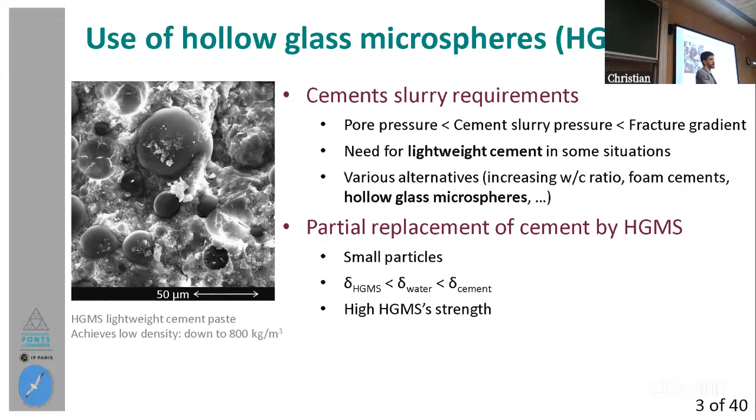For this purpose, I'm going to focus on two main aspects: the filler effect and the pozzolanic activity. To understand this, we first need to understand cement hydration. The clinker is composed of tricalcium silicate and dicalcium silicate that react with water during cement hydration to form calcium hydroxide and calcium silicate hydrate.

Knowing that, these spheres may present some filler effect, which in the context of this thesis, not at the scale of the sphere but at the scale of the hydration products, may act as nucleation sites for cement hydration products. This increases the kinetics of hydration and improves or increases the compactness of the material at short curing time. Then at long curing time, we can also have pozzolanic activity.

This is a chemical reaction between the silica of the spheres and the calcium hydroxide from cement hydration, forming secondary CSH. This reaction is also well known for increasing the compactness of the cement matrix, which a priori is a good thing. But the cement will not only be subjected to replacement with the spheres, but also to the conditions existing in a CO2 injection or legacy well.

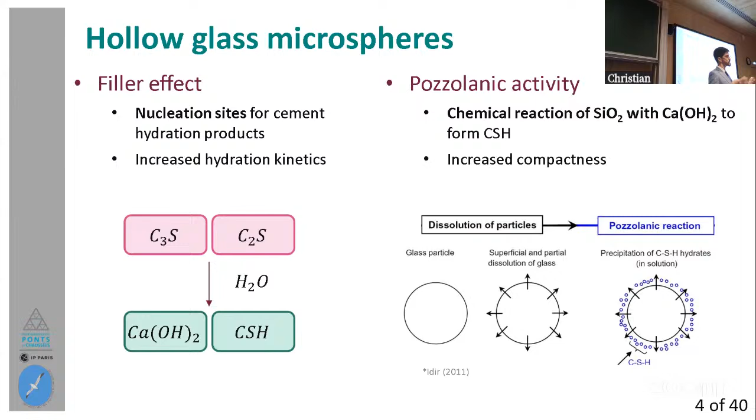In this regard, we have to take into account cement paste carbonation: calcium hydroxide and CSH react with carbonic acid to form calcium carbonate, water, and leached silica. This results in a change in porosity and a decrease in pH due to the consumption of calcium hydroxide. This will be important later on, that's why I'm focusing there.

From the research of Kutchko and Barria, there is a propagation of the carbonation front, in which we have an inner part that is mainly unaltered, and an outer part that is more altered by this exposure.

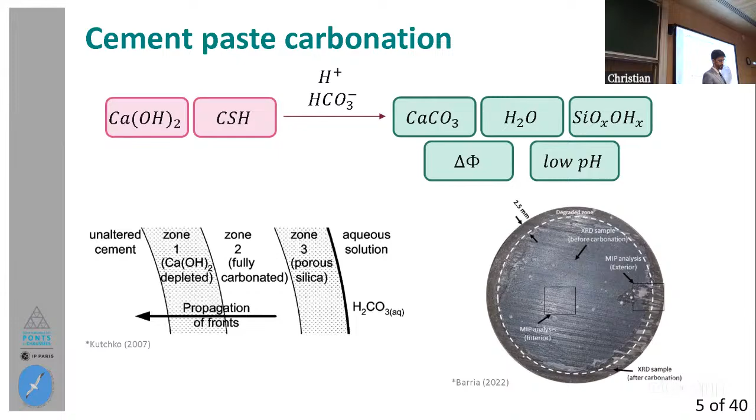With all of this taken into account, we can now establish the main objective of this research: being able to assess the performance of this lightweight well cement paste, in which we replace cement with the spheres, for CO2 geological storage. To reach that main objective, we have three different objectives.

The first is assessing the properties of the cement with spheres in terms of microstructure characterization and mechanical properties. Then we assess the changes in these two properties due to exposure to supercritical CO2 conditions. Finally, we verify the suitability of this compound lightweight material in the context of CO2 geological storage, injection, or legacy wells by numerical modeling.

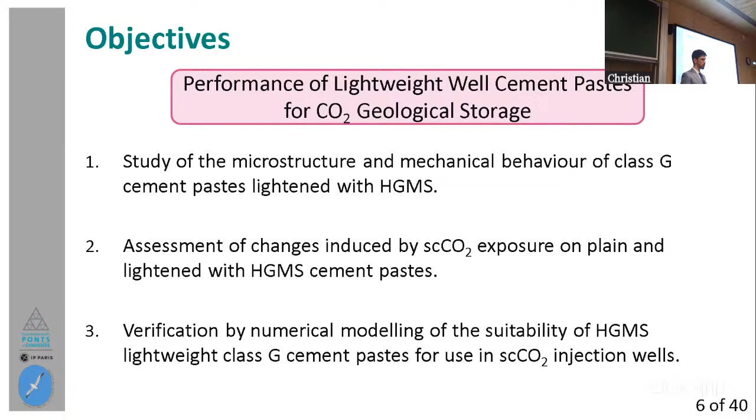Having said that, here is the general outline of the presentation, which has two main parts. First, the experimental characterization part, which I will talk about right now. Then I will have the modeling part. Finally, I will present some conclusions and perspectives related to this work.

Advancing to the experimental part, I'll show you the materials I have been using. I have three main materials: hollow glass microspheres called HGMS27, which will be the green one, and HGMS41, the blue one. In that table, you can see the main properties of these two hollow glass microspheres.

First, the very low density of 280 and 460 kilograms per cubic meter, the mean particle size of 30 and 40 micrometers, then the strength, which gives them the name: 27 megapascals for HGMS27, 41 megapascals for HGMS41. Then we have the content of silica, which is high in both of them.

This is related, if you remember, to the pozzolanic activity, which is around 60% for both of them. Finally, I have used class G cement, a moderate sulfate resistant class of cement manufactured according to the 10A standard of the American Petroleum Institute, which has a density much larger than that of the spheres, around 3,000 kilograms per cubic meter.

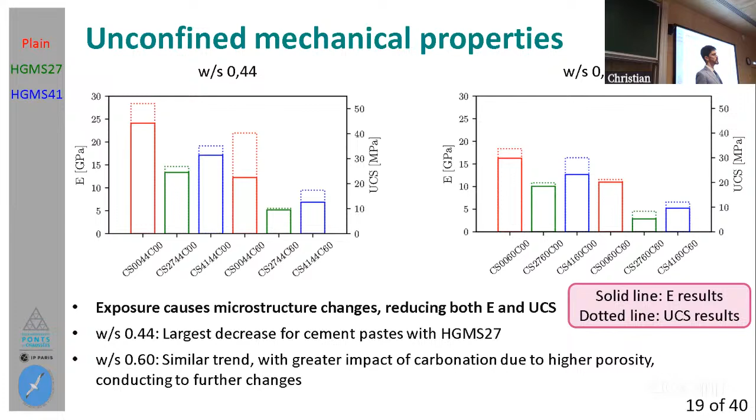If we now want to take a look at the results of strength obtained on both unconfined and confined compression tests, here I show you the results of unconfined compressive strength which I have shown you before. The solid line points correspond to the non-carbonated specimens, and the dotted line points correspond to the carbonated specimens.

You will see that we have this lower strength at low sigma 3, but then as we increase the sigma 3, we have a larger extent of the increase in the frictional behavior of the cement paste after carbonation, which can be seen here to here.

With this data, we're able to obtain these strength parameters that we will then use in the modeling part, which are the results of cohesion and friction angle for the non-carbonated samples in this table here and the carbonated samples in this table here. You will see that the cohesion here is relatively high and here is relatively low, and then the friction angle here is relatively low and here relatively high, which corresponds to the behaviors shown.

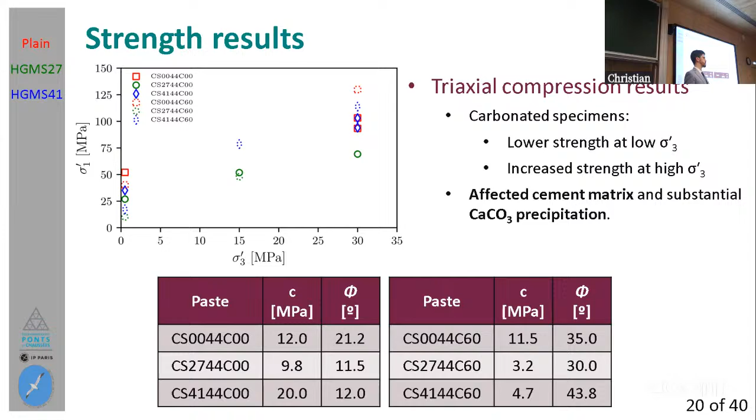So I have talked a bit about modeling, so I'm going to that part now, even though I have already got a bit into it. Here we go to the modeling part. We'll start again with the methodology, and there you will see that I have followed this same three-part structure, because I like to be repetitive.

The idea here was to make a numerical simulation of the carbonation process in well conditions. For achieving that objective, we have gone first to an estimation of elastic parameters, which was done with an analytical homogenization model I have used, considered in two cases: the first is the perfect interface condition, and the second is the imperfect interface condition.

Then I have done some validations with laboratory results, which was done by calibrating key parameters. Then I have modeled the conditions attained in the carbonation cell, and then validated the results obtained from compression, whether unconfined or confined compression tests.

Finally, I have done some modeling under real-world conditions, in which I modeled a slice of the cement annulus, and the idea there was to predict the behavior of this compound material, and particularly to assess the suitability, which is the main objective, of this compound lightweight material in these particular conditions. This was done using the Bil finite element code developed by Patrick Dangla from the Université Gustave Eiffel.

This is a fully coupled chemo-poro-mechanical model, which solves three equations. We have first mechanical equilibrium, then fluid mass conservation, mainly the conservation of water, from which I'm going to focus particularly on the porous medium deformation, which depends on the elastic parameters of the porous material, which is the cement matrix.

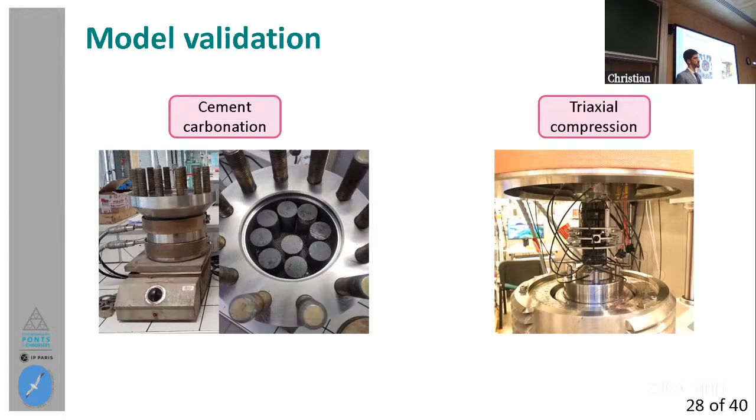Up to now I have shown you the results on this analytical estimation of elastic parameters, and I want to see what the application for this will be. For doing that I will go on with some validation of the model, considering two cases: the first is the CO2 cell, the cement carbonation cell, and the second is modeling triaxial compression tests and validating the results.

So first, here is the carbonation cell. This is the geometry that I have adopted. In general terms, it's a rectangle with an axis of symmetry here, and another axis of symmetry down here. Region 2 and 3 indicated there represent the external edge of these cylindrical specimens. I have applied the conditions corresponding to the carbonation cell, which are CO2 concentration in regions 2 and 3, confining pressure and fluid pressure in these two regions.

With this, I was able to obtain some results, but not before calibrating this important parameter here, which results in the effective diffusivity that we obtained in the model. This effective diffusivity relies on this parameter that I have calibrated for all the samples. I have used the same value of the parameter, and it also accounts for the porosity that we have in the cement paste, the cement matrix, actually.

So let's begin with the results obtained for the calcium hydroxide volume fraction across the cement specimens in the plain cement paste. You will see a pattern of colors indicating that in the most inner part we have roughly an unaltered cement paste, and in the outer part a more altered cement paste due to carbonation. But we never reach a zero content of calcium hydroxide, which is more or less what we obtained from the pH indicator test, where the outer part didn't appear to have a low pH, so we can relate that there.

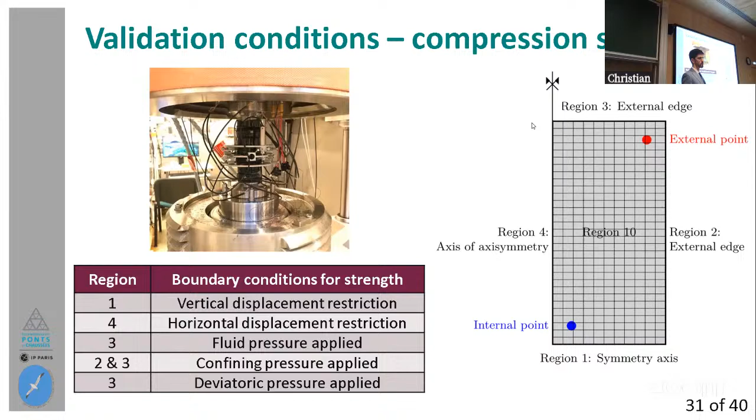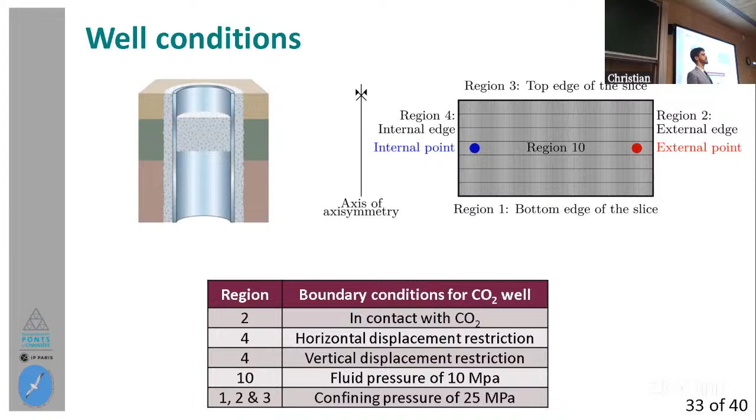So with this, I'm only going to show you some results on the variations in the volumetric fractions of each phase present in the cement with the spheres.

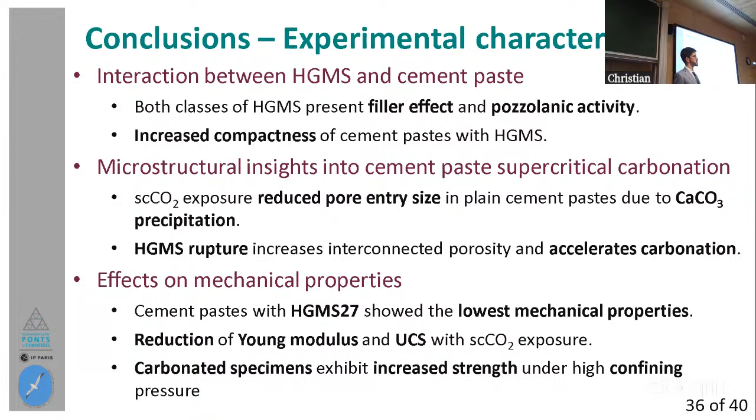In the modeling parts, we obtained, with the modified homogenization model, a good predictive capability with a perfect interface already, but we were able to improve it a bit. We got errors that were even lower than 5% in absolute value.

We were able to account for the rupture of the spheres, which affected both the interconnected porosity and the diffusivity of the CO2 in the cement matrix. We were able to calibrate some key parameters to obtain the results obtained in the lab.

Finally, we were able to model the exposure to CO2 in injection well and legacy well conditions. There we have to take into account the limitation I mentioned before, which is not considering the pozzolanic activity and the consumption of the sphere's outer part due to that pozzolanic activity.

As for perspectives, I'm only showing some of them here: investigating the extent of this sphere consumption during the pozzolanic activity, which could be done, for example, by nano indentation tests.

Then it would be nice to explore the frictional behavior of carbonated cement specimens, which could be done by an exhaustive campaign of triaxial drained tests.

Then it would be interesting, as we did with the elastic parameters, to develop an analytical model to account for and model the strength of this composite material.

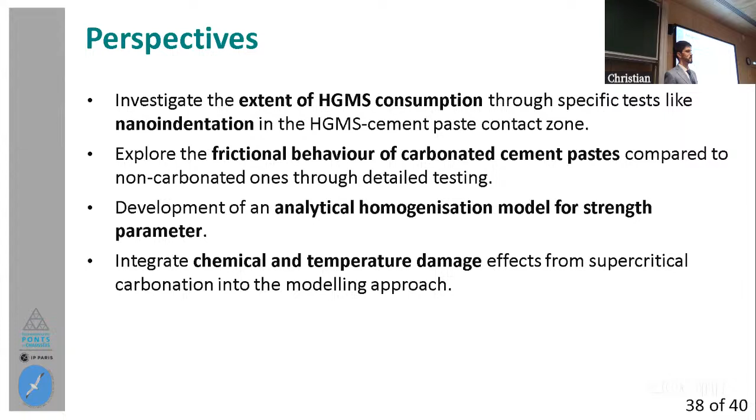And finally, it will be interesting to integrate into the chemo-poro-mechanical model the damage related to chemical and temperature exposures.

To end, I want to acknowledge all these institutions. First, the universities: Universidad Nacional de la Patagonia San Juan Bosco, and the École Nationale des Ponts et Chaussées. Also the labs in each of these institutions, here Laboratoire Navier, and all the people there who really helped me a lot for this thesis. Also at the Instituto de Tecnología y Progreso in Buenos Aires, they helped me a lot there.

And then all the financing institutions, which helped a lot to carry on with this project. So, well, that's all. Thank you very much. I'm sorry for the slight delay.

Thank you for listening.

Yes, maybe I was a bit pressed. Yes, so we have just some seconds just to have a break. Okay, yes, thank you very much.

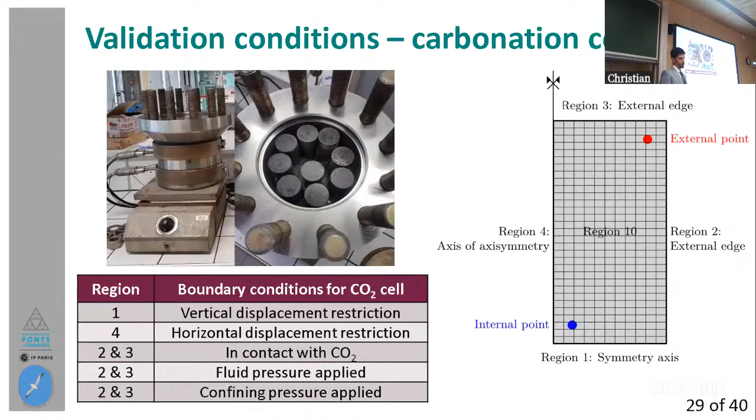Yes, well I have some results here. I have to go through the presentation. I will get there soon. Thank you. Okay, let me prepare this.

Okay, it's here. So there, well, I present all the results. I don't remember exactly - okay, it's here. So the dash-dotted line corresponds to the cement paste. So it's CS27 - no, this is not it.

The solid line corresponds to CS2744 C00 with 30 megapascals of confining pressure, and the dotted line corresponds to the same cement paste but with 15 megapascals. Maybe that's what you're referring to, right?

Yes, what I mentioned is that there is some influence on the difference in behavior between this one and this one due to the rupture of the spheres, which is actual mechanical damage that is occurring. So I was referring to that - maybe I was not clear in the manuscript. That was the start of my question. Okay, perfect, sorry.

I wonder what would be the different effect of the pore pressure and of the confining pressure. Let's assume you're doing the test in dry condition or saturated condition, and you apply a pore pressure. The total stress and the pore pressure affect the behavior differently.

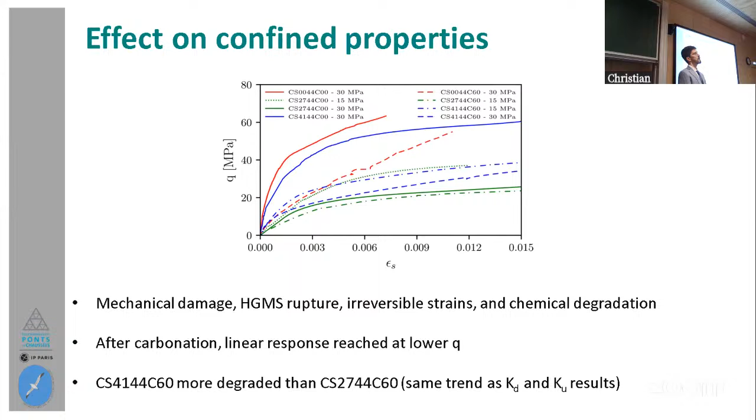Which is represented in the equations that I presented somewhere at the beginning of the modeling parts. We are almost there. So we have fluid mass conservation and CO2 mass conservation.

And then the chemical reactions are all chemical reactions at equilibrium. Yes, there is no kinetics there. I've seen other models into which it might be of interest to also consider the transport of other dissolved species that might react with CO2 or with the solid phases, and also maybe some kinetics in it. But I noticed that you do not consider this. Can you spend some words on it?

Yes, well, related to the kinetics, we do have an equation that I didn't present here, but we have a calibrated parameter as well, which is the tau that's in the manuscript. I haven't taken it to the presentation, but it could affect the kinetics, and in fact it affects the kinetics of the carbonation reaction. But we are not accounting for the kinetics from a chemical point of view, actually.

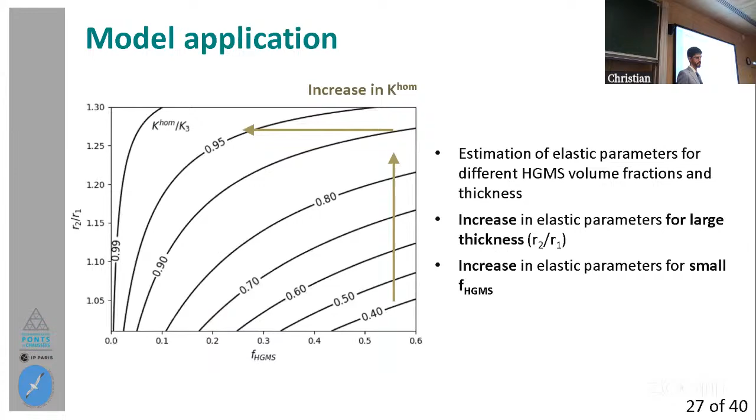How to answer that? Well, let's see. Where will I go? Let me think. I think I will go to the microstructural parts, maybe here or here. Well, we have mentioned porosity, the increasing porosity, and the abundance of calcium carbonate. So that's why I'm going here. Okay, let me formulate the idea in my head.

First, I want to say that I have researched quite a lot regarding this behavior of the cement paste, and different authors publish different results. So this is already an issue. These are my results, which could be more or less okay, or could be more or less not okay, so I have to take that into account.

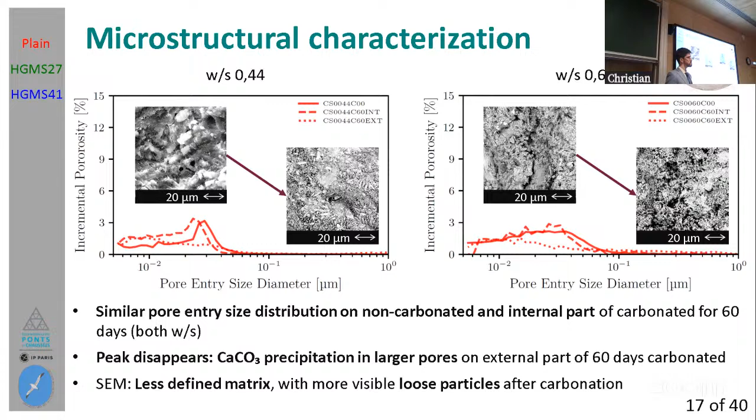So I will come back to the beginning because I have some questions on the formulation that I do not understand, from my own understanding. There are 2 points I have not really understood. The first one is why you keep the ratio water to solid content and not water to binder content, because it seems that the water is much more there for the binder than for the spheres.

And the second one, I do not manage to understand how you get your 10% mass, because when I make my calculation, I can see... so you can see, okay. Or maybe I must be very poor in mathematics, because I can't see the 10%. Where are they? How do you manage to get it?

Okay, yes, so I can explain all of this. The first thing that we did, as I presented here, was analyzing this sphere effect and mainly the possible pozzolanic activity, because this thesis was a continuation of my master's thesis, in which we had already seen some results, and we were already trying to understand that maybe this pozzolanic activity was occurring. So we started just like that, by saying, okay, what's the interaction, could it be pozzolanic activity, and how do we measure that?

To measure that, we go to the ASTM C311 first. There they state a replacement of cement with the material being tested. So they say, okay, we had initially, I think it's 500 of cement in the plain cement paste, and then they have 400 grams of cement and 100 of the material being tested, I think it's 20%. That, according to them, is 20%. But if you do 100 divided by 400, you will obtain 25%. That's maybe what you did. Yeah, so it's not that — it's 100 divided by 100 plus 400. Wow, okay, that's it, and we did that.

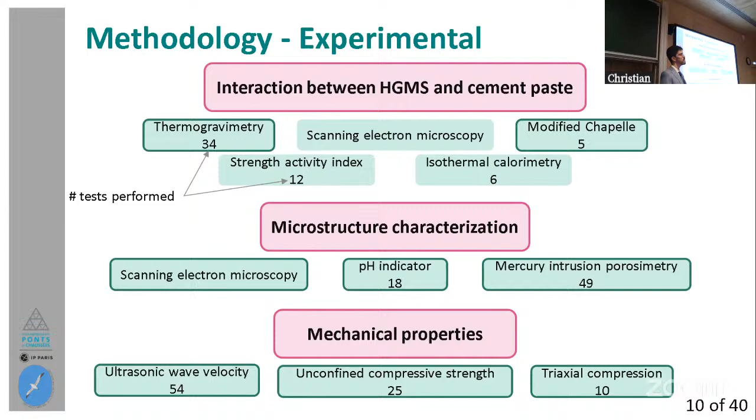When we make some... My last question, after that I will have a lot because your work is so interesting, but I will ask one last question on modeling: to be sure, how do you estimate the advancement rate of the reaction? You can put the probabilistic equation if you want.

The mass conservation equations, it must come... here, yeah, there is a dXc_Ri divided by dt, which is the advancement rate of the reactions, Ri. So how do you estimate it?

You assume that all the CO2 that comes is consumed, and do you assume that there is a sort of sequence between all the reactions, so that one reaction finishes before a new one begins? Or do you assume that some percentage of reactions can occur together? How do you estimate that?

The chemical part is more or less simplified. So how it works is that it starts by consuming the calcium hydroxide, the ions from the carbonic acid react with this, and once it's completely consumed, then it follows with the calcium silicate hydrates until it's totally consumed, and that's it.

Okay, so you follow the model of Valiant. Yes, exactly. I think it would be good to say that clearly. I haven't said that explicitly.

Maybe too rapidly, but when we see the question we do not really understand. Maybe when we look at your graph after that, we can see, okay, he should have done that, because we can see some kind of sequence here between all the systems. But it should be mentioned more clearly, or maybe you have said it and I missed it. No, but well, I will take a look at that.

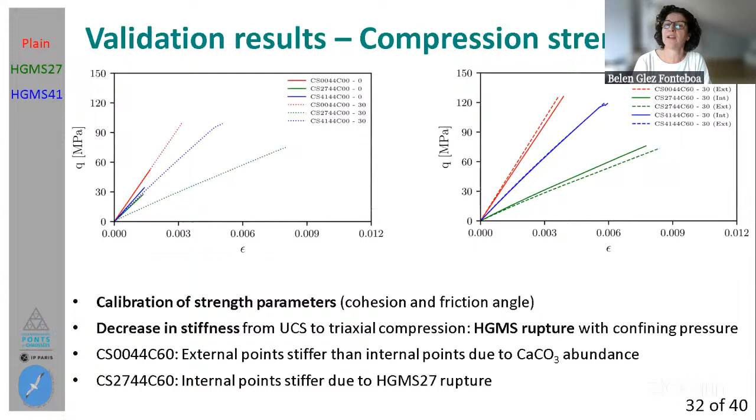First of all, I have some questions, not too many, only a few. First, I would like to ask you about some of the mixes that you have developed: you have included some superplasticizer in them, I don't know, only in the mixes with 0.44 water-to-cement ratio, if I remember well. I don't know if you have considered the effect of this superplasticizer, because maybe some of these kinds of materials include some retarding effect, or even some air entrainment in the mix, in the cement paste. So I don't know if you have considered this, and if you have thought about discussing the results considering this effect. Okay, yes, this question I was expecting at some point.

Yes, as you mentioned, I have used superplasticizer in these two specimens. I used it at 0.2 and 0.3% by weight of cement.

The actual answer is no, I didn't consider any effect that superplasticizer could have on the cement matrix microstructure. I only added it to make it possible to mix these mixtures, because I was adding 10% by weight of these spheres, and since they are very light, it's a huge amount in volume, like 50% volume sphere and 50% volume cement.

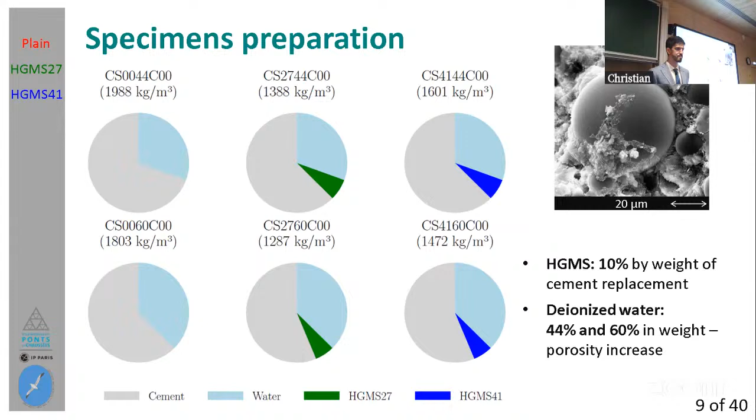Anyway, it's okay. I think my other question was regarding the carbonation process. Some of my colleagues have already asked about it, because you introduced a very high pressure and a very high temperature, and I think they suggested you separate the effects of pressure and temperature. I agree with them, it would be very interesting to know the effect of the different parameters. You've already answered this, so it's okay.

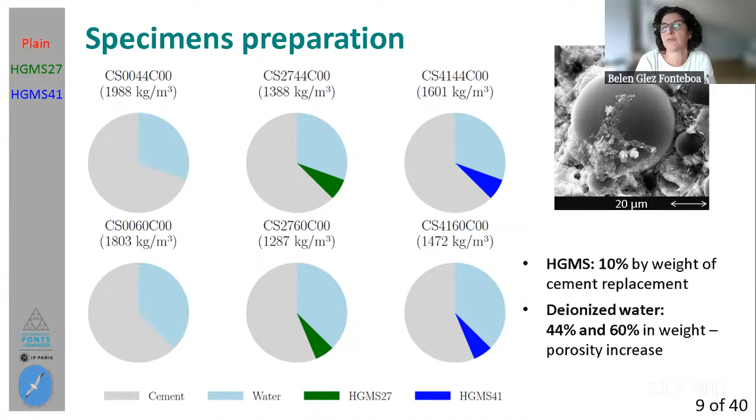My question is, why 20 megapascals? Do you know more or less the pressure that this material is going to need to support in the well? And in this regard, after analyzing all your results, can you suggest some recommendation, like not using this material at the bottom because the pressure is somehow at a value that's going to break the spheres, or not? Can you make a general recommendation about the use of this material according to pressure? Because 20 megapascals seems very high. I suppose not all of the well is subject to 20 megapascals. I don't know if you can say something about that.

For that, I'll go back to the very beginning. The general idea is to impose conditions in which the CO2 has achieved supercritical state. If we see that, we only need 7 megapascals and 30 degrees centigrade.

I've kind of answered this in one of the previous questions, where the idea was to continue the investigation performed by previous PhD students, who used these conditions found in particular deep reservoirs located at more than 2,000 meters, which is far enough to attain these conditions. So the idea was to continue this work with new materials, this hollow glass microsphere cement paste, and have more experimental data in this context.

As for the other recommendation you suggested, yes, well, of course, I do think an important result I obtained is related to the pozzolanic activity. Why? Because of the consumption of the outer shell of the glass spheres, which will affect the strength.

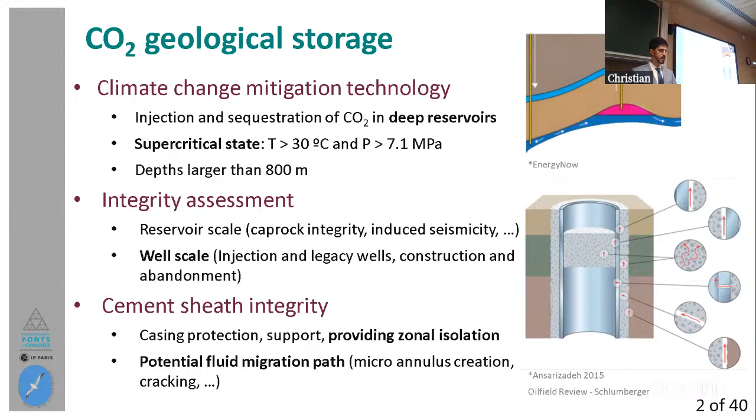As far as the results I have now, in general terms, for the results I obtained—let me show you, give me one minute. So, as for the result I obtained here, I was able to see that the spheres 27 were already starting to break. This pressure corresponds to, if I remember well, around 15 megapascals.

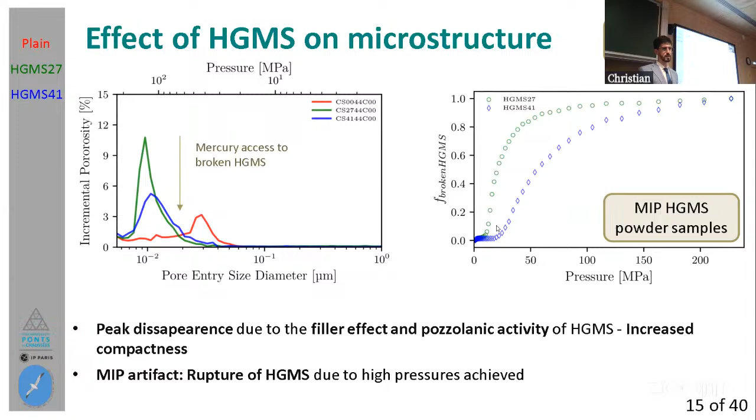Accounting also for pozzolanic activity, I would recommend, if I don't have the actual number, to apply them to pressures even lower than 10 megapascals, to have some idea they will reduce thickness at some point. For the blue ones, which start to break at around 25-30 megapascals, with maximum slope reached at 35 megapascals, I recommend something similar but adapted: going to 15 or 20 megapascals, where we are safe to avoid rupture of the spheres.

But for this, I have to say it would be very interesting to assess the consumption of the outer shell, which could possibly be done by nano-indentation. With that result, we would have more precise results for this possible application.

Okay, perfect. And my other question, I don't know if it has already been done, is about other possible tests like capillary absorption to confirm the interconnection of the pores, or even permeability tests for this kind of phase. I don't know why you avoided this kind of test, or if it's a matter that, since you start a research, it's difficult to develop all kinds of tests. But this test, regarding confirming the MIP results and the rupture of the hollow glass, I think would have been very suitable.

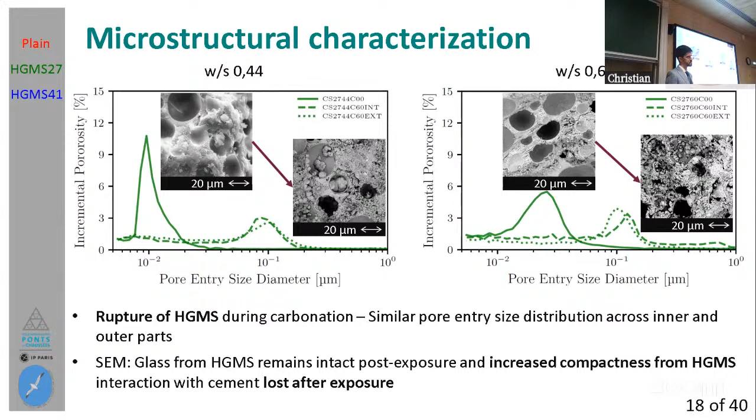One question: somewhere I wrote it in my short report. In the end I was really annoyed because I didn't know where the problem was, and it was sometimes difficult for me to understand the different pore size diameters, because on some figures you can see there is a shift of the peak of the pore size distribution to 10 nanometers. Here, are you talking about this one?

But elsewhere it was written that there was also carbonation precipitation, so in the end, is there any problem? And it's true that in your modeling there was a question of the crystallization pressure effect, but the answer to Antonio was that this was not taken into account because it's more difficult to treat.

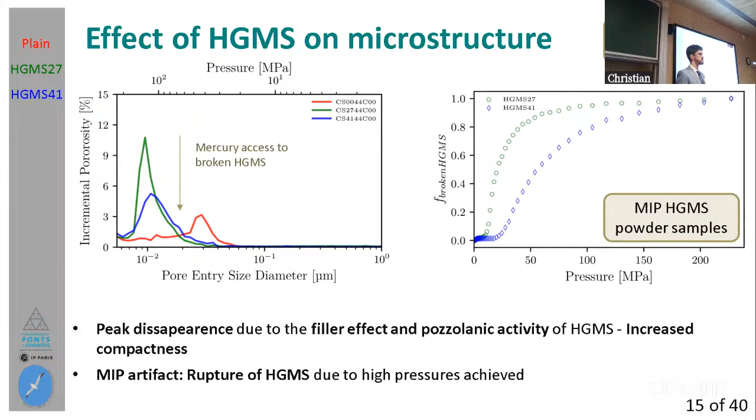But well, I was concerned because you did the work of running the modeling with imperfect interface, and that gives you better, almost perfect results for the shear modulus. I didn't understand why you did not use this afterwards in your micromechanical modeling. So is there a problem with the interpretation or calibration of your interface parameters?

I think there is a problem in the manuscript. I wrote something that is possibly not clear. Yes, I did use the imperfect interface model, so maybe I wrote something wrong there, but I did use the imperfect interface. It should be me, I'm pretty sure. I will have to take a look at that to clarify and correct it if needed.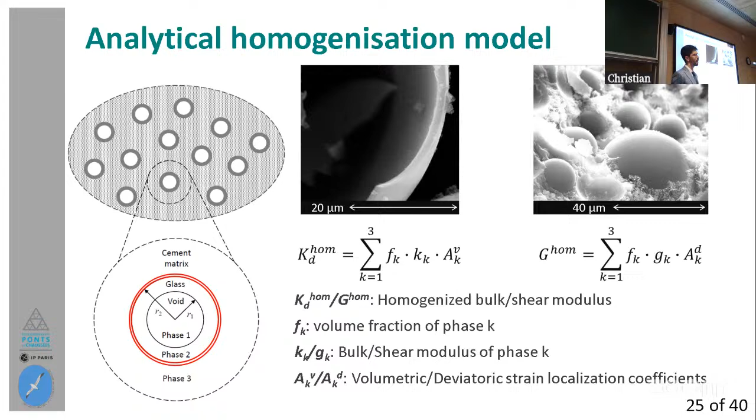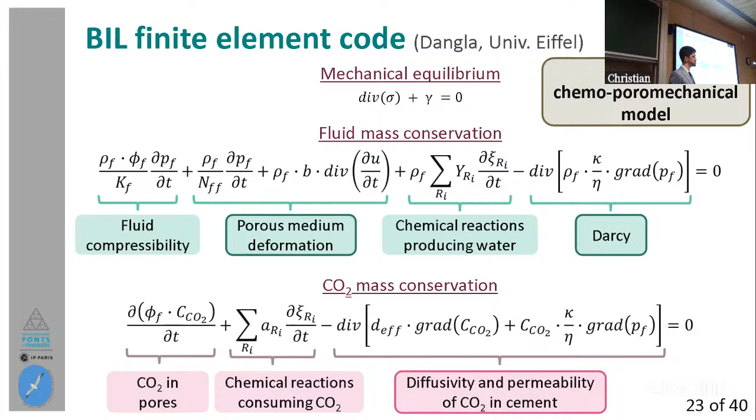Because you have combined lots of experiments on given materials, and you combine this with predictions. To do this you calibrated some complexity, using some results data from the experiments. Now my question is, if you had to do this again for similar products, how much confidence would there be?

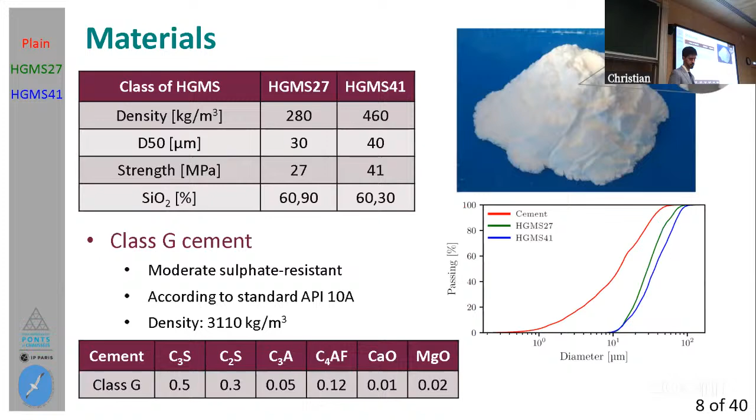You mean in this? Just to be clear, I will go all the way down. No, not that much. Here, you mean here, right? Not necessarily, it's a very general question about the work you have done. Okay.

If we already know all this state of the art, I will say okay, we know about the pozzolanic activity, so I would like to have a way to measure how the spheres are affected. If we know that, I will be able to say the confining pressure that I will use in my cement paste, for example with different dosages but the same classes of spheres. This idea arose during my PhD. I will do some nano-indentation tests to see the shell thickness of the spheres, and with that, possibly obtain the strength and how it decreased with the pozzolanic activity. Then I will be able to determine the maximum pressure that I would apply during my experimental program.

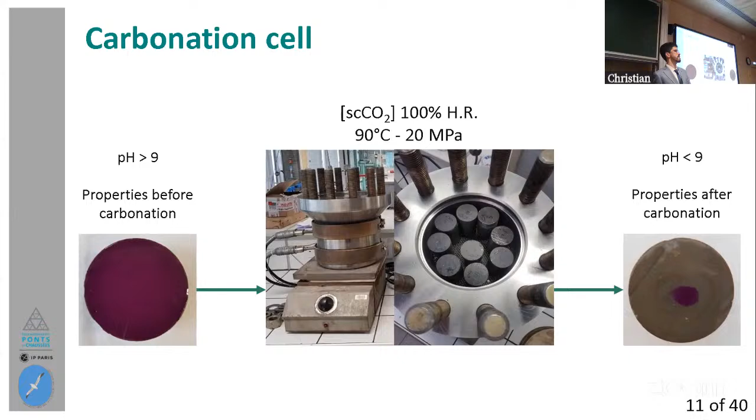If I don't have this result, I would just say around, but this is a bit ambiguous since I don't have the number for this. But if it's only on my mind, I would say something like 10 megapascals or 5 megapascals less than the results I obtained on these powder samples.

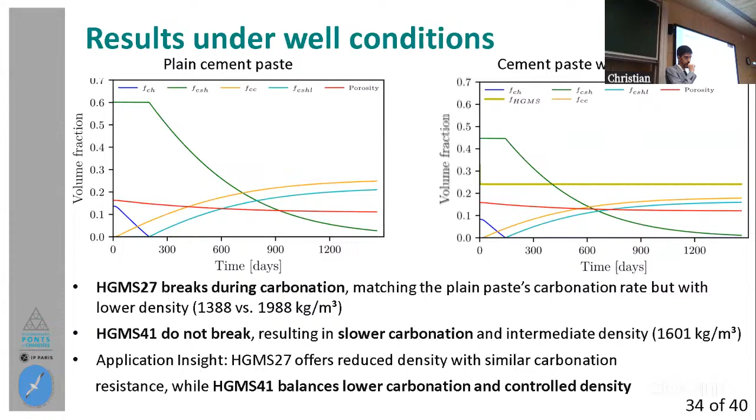If I go somewhere over here, the blue one is the HGMS27. It starts breaking, or the main peak is at 16 megapascals, so I will go somewhere between 6 and 10 megapascals less, more or less, not more than that. For the red one, the HGMS41, which is stronger, the main peak occurs at around 35 megapascals, so I will go between 5 and 10 megapascals less, so between 20, 25, 30 megapascals in that range. With that I will be more or less safe that I'm not breaking them. But to properly say this, I have to measure to what extent the outer shell is affected.

I don't know if with this I answered the question, but okay. Yes, okay.

I have written some remarks on the description of the thesis. I congratulate you for this work. I appreciate it, well, good to hear. And yeah, you have done impressive work. So congratulations. Well, thank you very much.

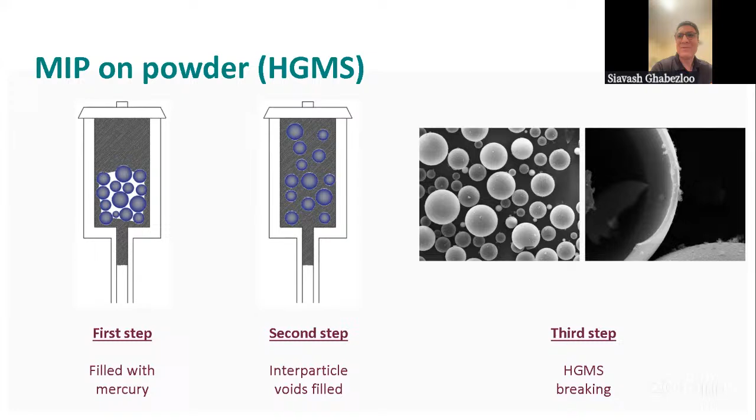Thank you very much. Thank you very much, Josh, for your words. Well, yes, it was very nice for me as well to work with you, and I enjoyed the article we were able to publish together. So thank you for that.

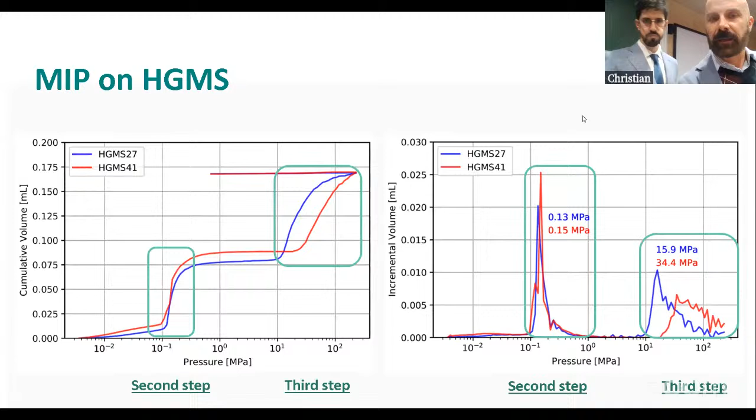The problem is that we have to move. Okay, you want me to move the? There should be a new session, I think there's a breakout room, yes, that's the thesis evaluation.

Inviting us to put unirse in Spanish, or join in English, and we have to go out.

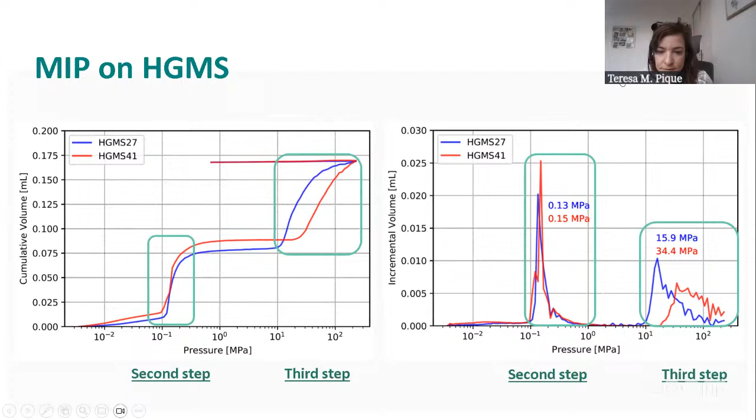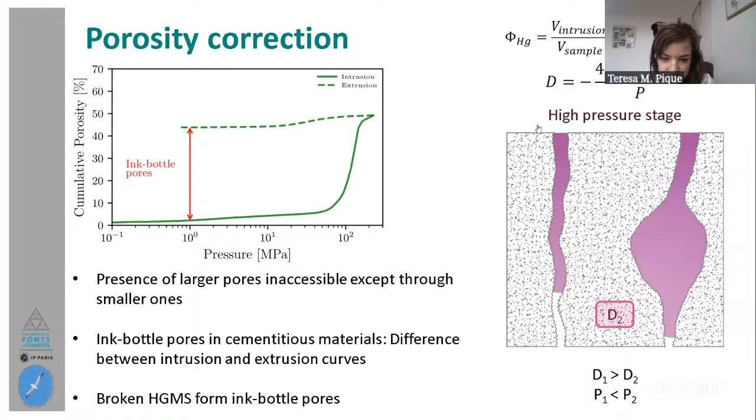Yes, I know, but how can I join this room? Oh, here it is. If you go to the three points, yes, there is the last one- no, sorry, the third one. In Spanish it's salas de grupo reducido.

Maybe it's closed room places. Also you will enter there. Profesora Maria Belen, you have to...

Maria Belen, you have to also. Maria Belen is also in the room. Teresa, you are not yet. No, but Sebash, did you find it? No, because I'm on mobile phone, so I'm looking for this.

I can move you to the room. I will move. Okay, please Diego, please Diego. I'll move Teresa now too. Oh, it's okay, no, okay.

Just give me a minute, because I have to join from another computer and mute this, because otherwise the people who are online are listening. Give me- that's it.